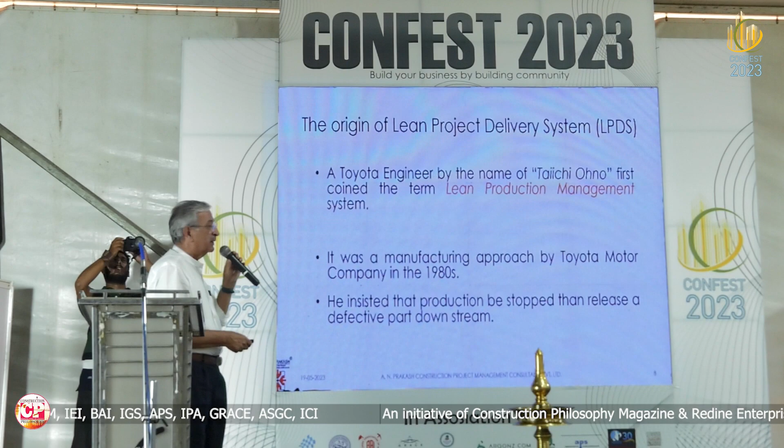The origin of lean, the lean project delivery system, came from Taiichi Ohno — a very interesting, fortunately Japanese, name, otherwise it sounds odd. His name is Ohno, it has nothing to do with English. It was a manufacturing approach at Toyota, where he said we can't have any wastage — if you find anything defective, we should stop it. That's where it came from.

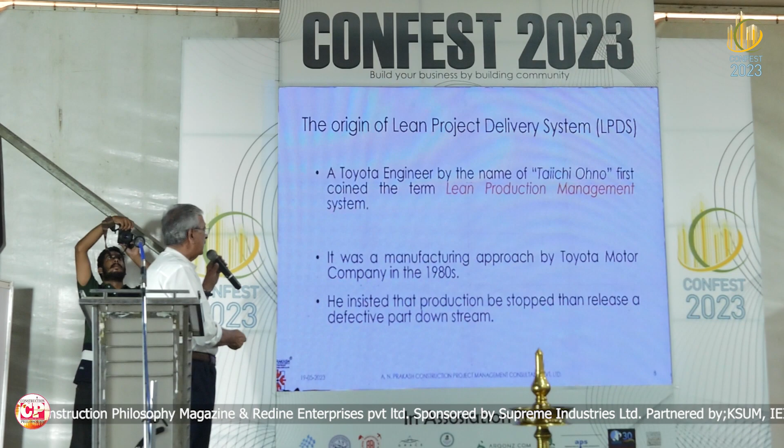And then we realized that if factories can adopt lean production management, why can't construction go lean? So that's how the concept of lean came in, saying let's just start looking at lean also. It is nothing but eliminating waste in all phases of the project.

Those of you who are in the construction field know that a project goes through a project life cycle from concept to completion stage. So every aspect of it, you can apply lean.

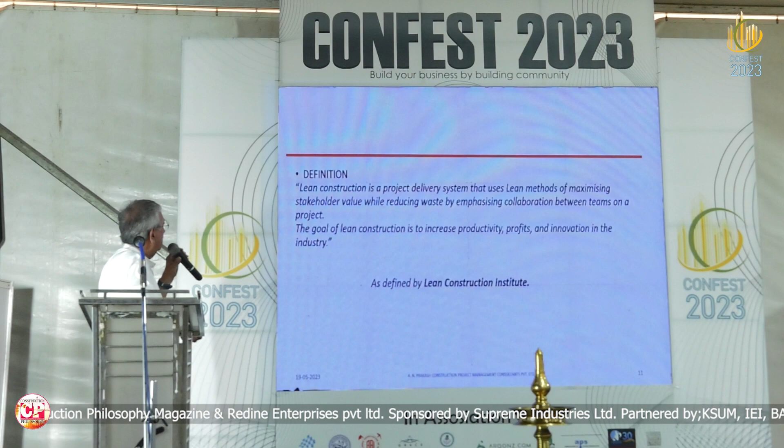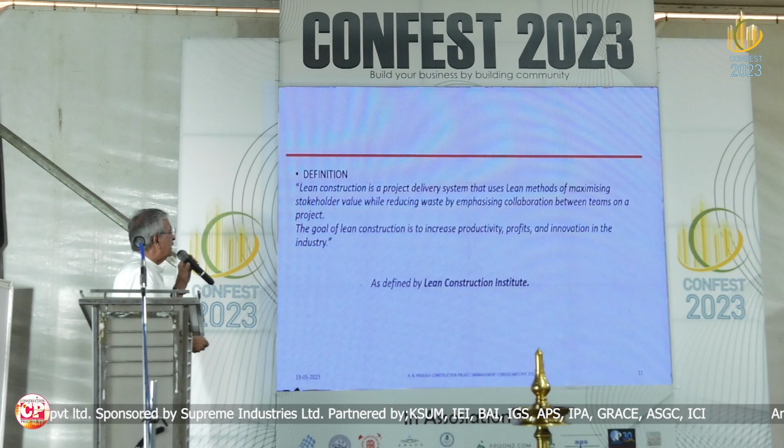This is what is defined by the Lean Construction Institute. Lean construction is a project delivery system that uses lean methods of maximizing stakeholder value while reducing waste, by emphasizing collaboration between teams on a project. The goal of lean construction is to increase productivity, profits, and innovation in the industry.

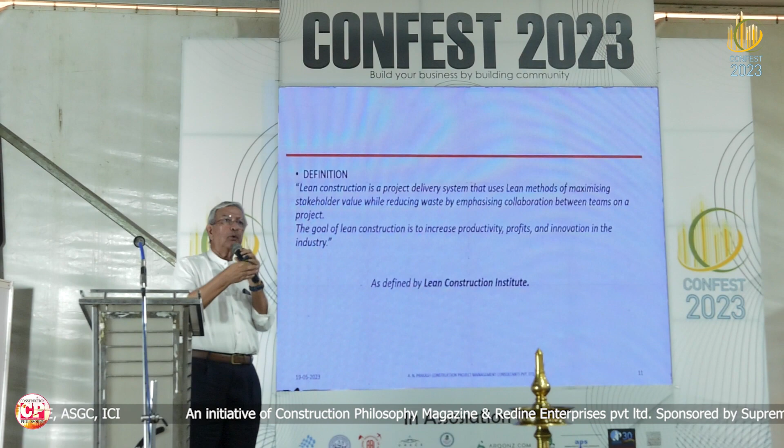I don't think I'm talking about anything different from what all of us have been doing. Mr. Iyer started saying that you have to talk and find out from the users as to what they want. That's done to make sure you don't end up building something that is not used. In the UK, they built economic housing which was not occupied at all because the users didn't want to go in there. So they didn't consult the users as to what they wanted.

This is one of the things that relates to the goals, tenets, or principles of lean construction. So it's the respect for people.

It's a very interesting one. When you say respect for people, what they mean is it is not just the stakeholders as we normally consider them, without involving the end user. The end user is one of the things that has been forgotten in most cases.

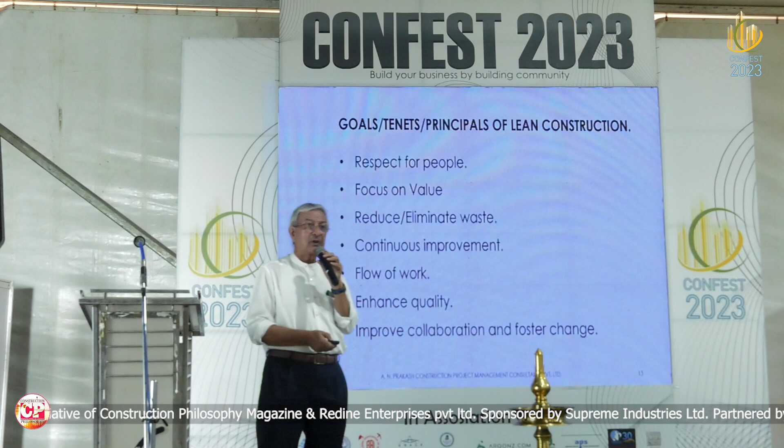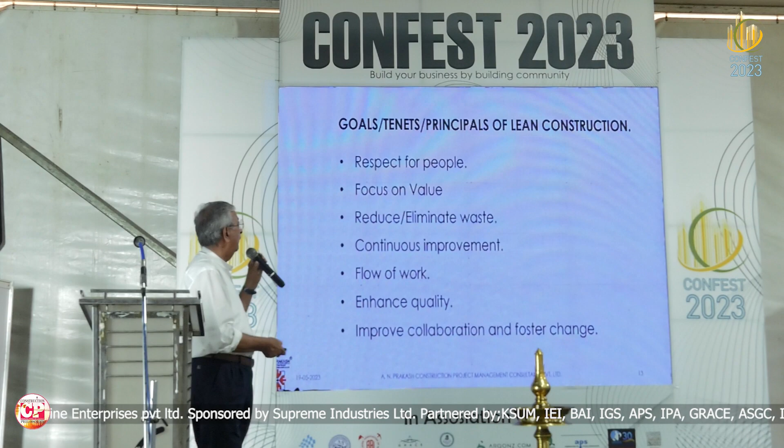I'll give you a few examples where end users were forgotten. There are a lot of papers published on it. Those interested in lean construction should read papers on that. So we just focus on value, reduce and eliminate waste, continuous improvement, flow of work, enhance quality, improve collaboration, and foster change. And everybody wants it.

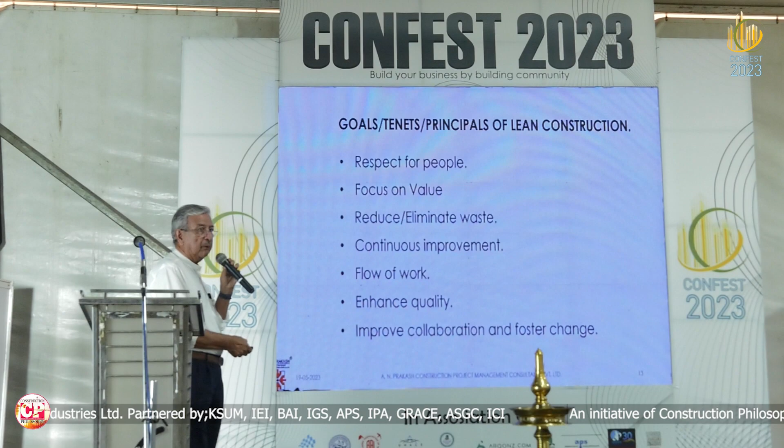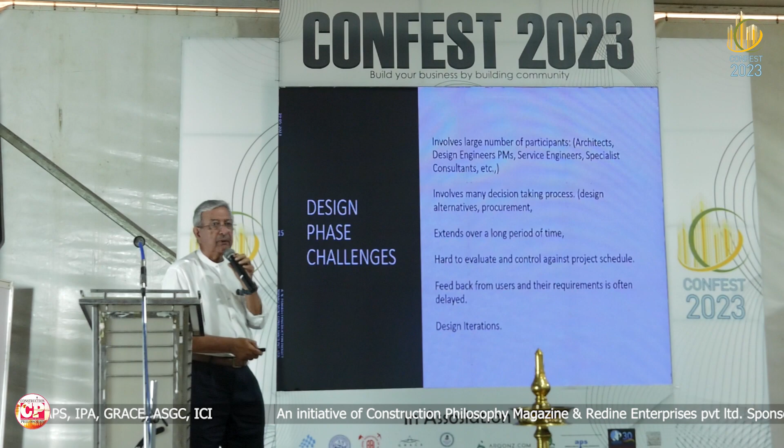So how can we achieve lean in the construction project management process? It involves a large number of projects and participants. One thing all of us accept is that initially it involves a large number of participants - architects, design engineers, PMCs, service engineers - and the decision-making process extends over a long period of time.

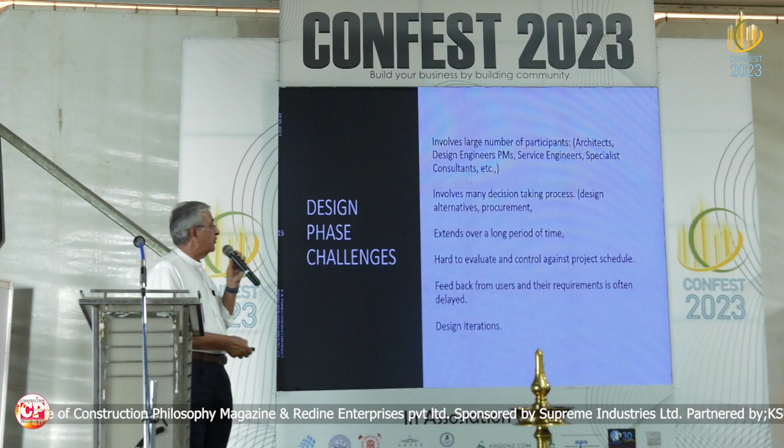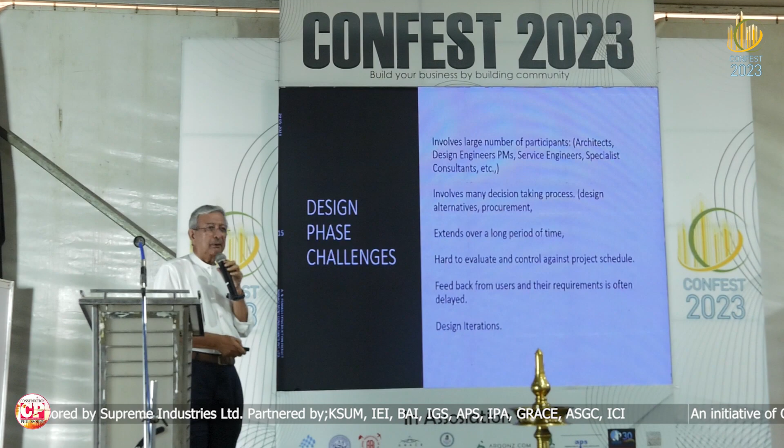It's endless. Every time an architect starts with it, you have a client who keeps on talking about - here comes my friend, Prakash. Satyavani, Satya Prakash has come. How did you know I had started talking?

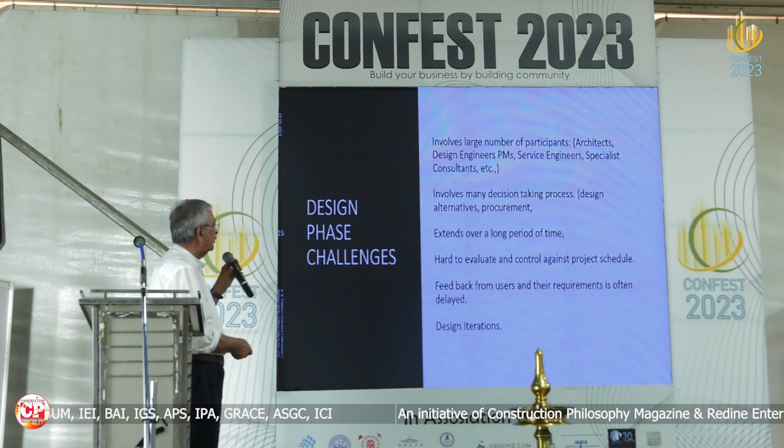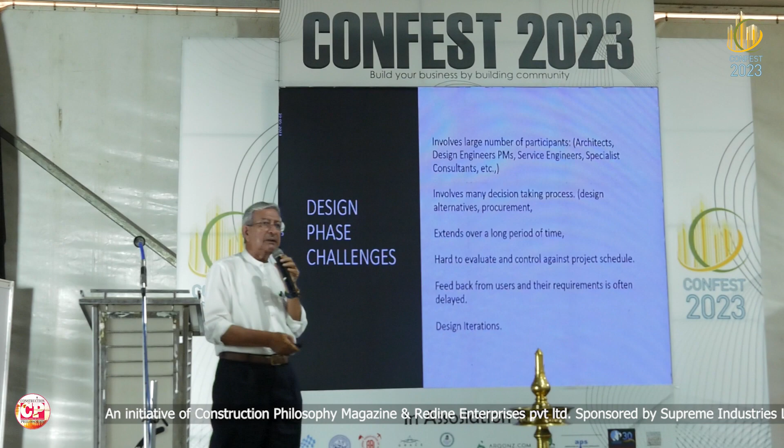It's hard to evaluate and control against the project schedule. Feedback from users and their requirements is often delayed. This is one of the things that causes delays. What we're talking about with lean is not wasting time. Time is the focus here, and that's why we're coming from the production mindset - you don't waste time between one activity and another.

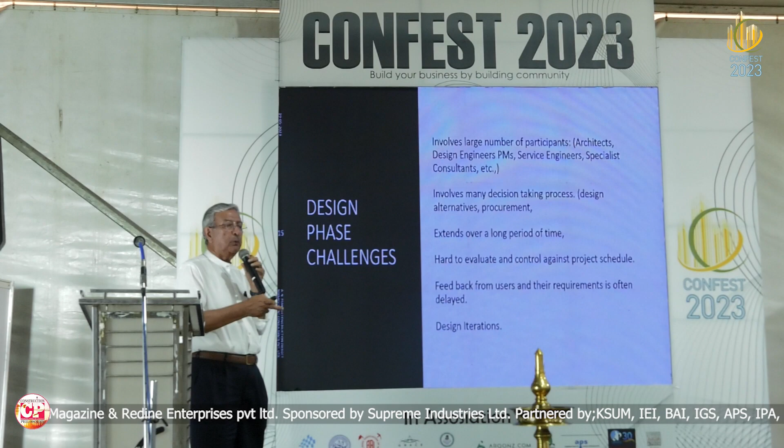The voice of the customer - this is something I want to stress on. Voice of the customer is something that is often lost. That's where we have to start.

So even at the design phase, we designed some very small nursery schools where we interacted with the teachers, and of course a lot of work needed to be done. There are also papers published on this, on how the involvement of the customer is required. For example, in the case of a hospital, the doctors don't know what they want, and it's up to us to have a checklist.

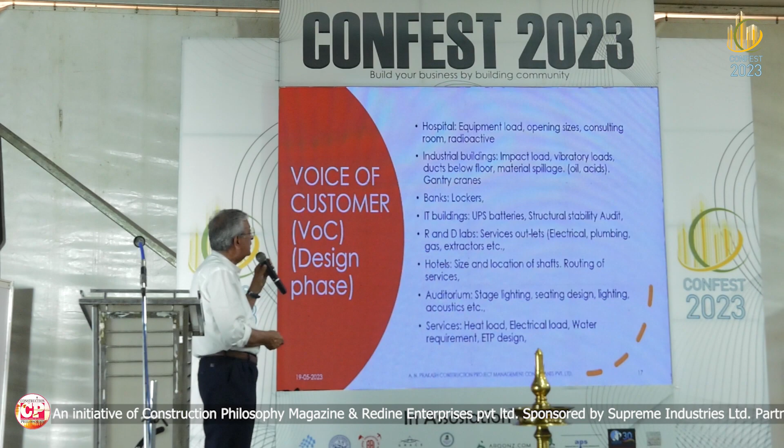We have done a couple of brownfield projects. I will show you some slides where, at the end of the day, they come and tell you they have an MRI machine weighing so many tons that they want to put on the first floor. So unless we talk to them, in some cases we have not been able to even bring it inside the building because of the structural configuration. So for industrial buildings, there's the impact load - particularly for a forge building, whether the whole foundation has to be isolated.

Banks - we have had banks where they come and say, I've got lockers which we have to put on top. IT buildings, hotels - I'll show you some sketches and photographs. I'm more interested in showing photographs, I believe.

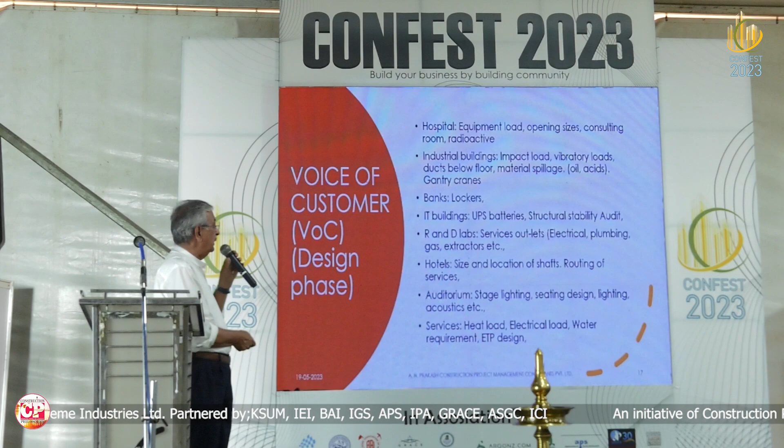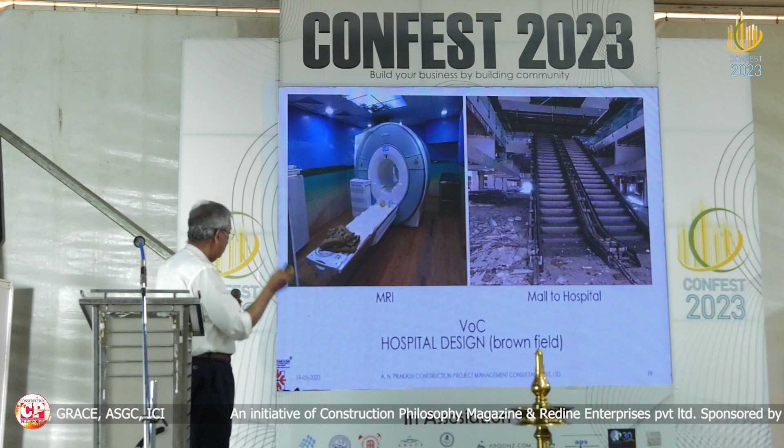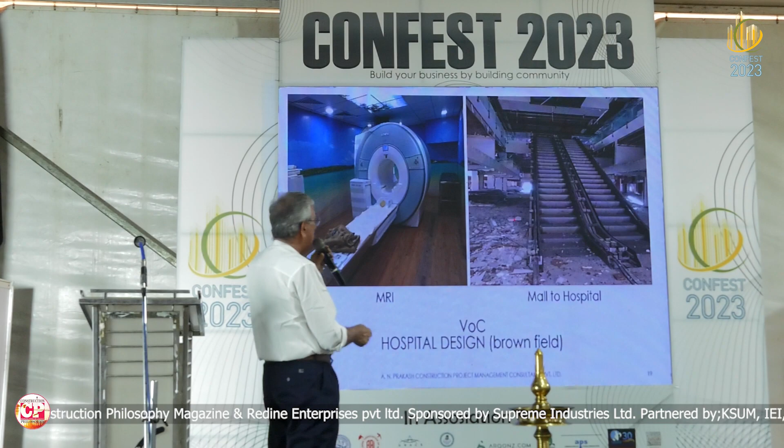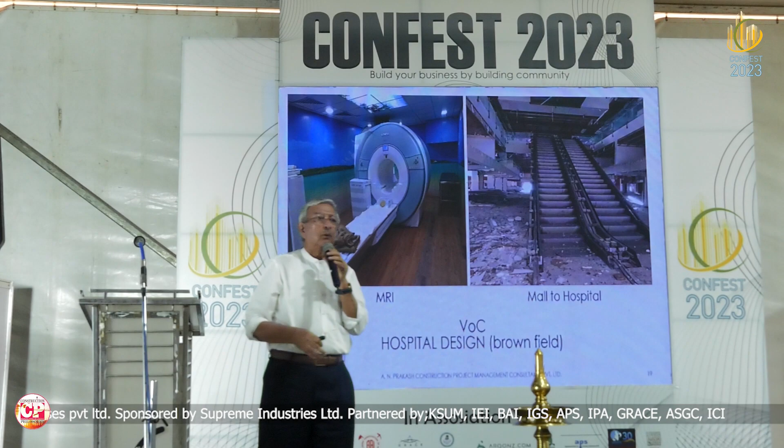See, this is an MRI. There's a fly which is very friendly to me. So this is a building which we converted from a mall into a hospital, where you can see there is an escalator. This was removed and we had to span all these things. And then one day they suddenly said that we want an MRI at a particular level. When we wanted to take this, it's a 6 ton load. It's just about 2 square meters. This weighs 6 tons. So there is an existing building.

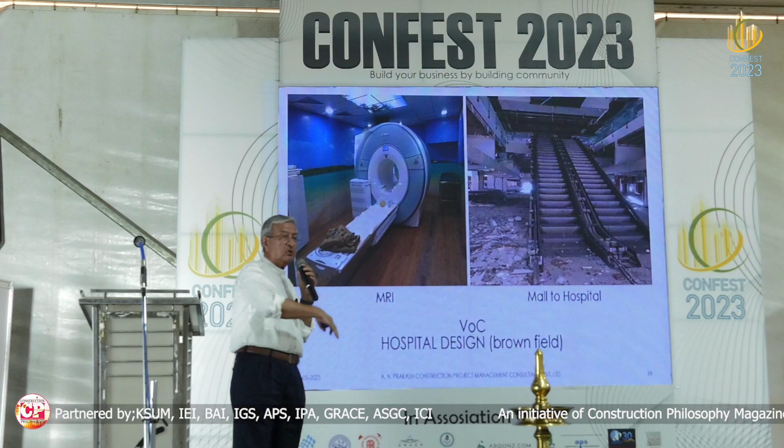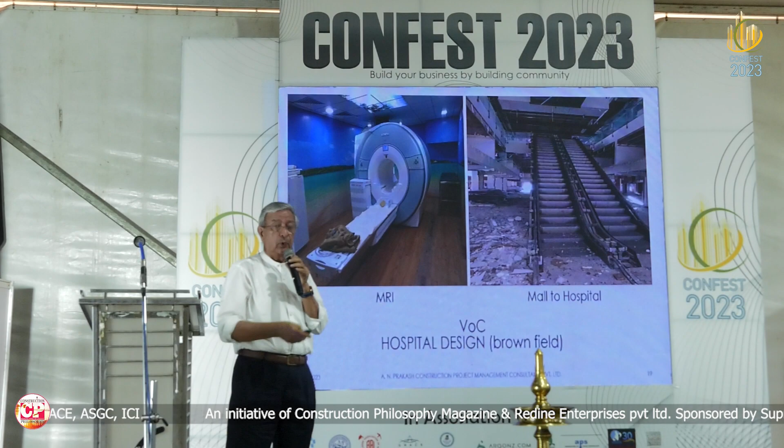So if you had not talked to those doctors and found out what you want, you will not be able to know what you have to give at the end of the day. Again, you will lose time strengthening that. If you were to do it earlier itself, you'll do better. There are many examples, I'm just giving you one or two because of paucity of time.

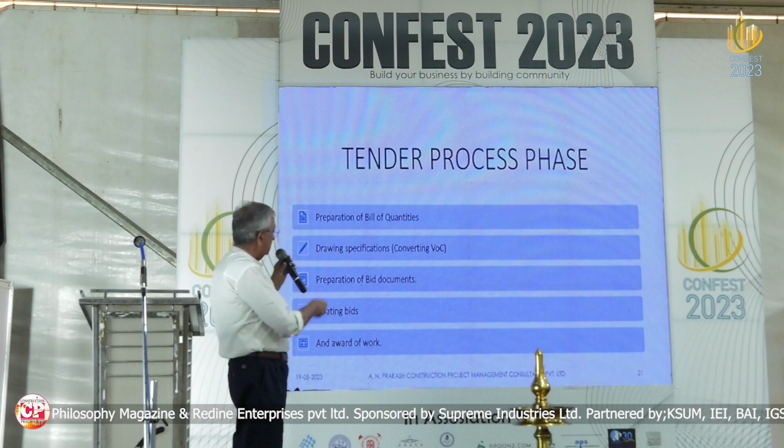The other thing is the tender process. Of course all of you know this, I'm talking to those who don't. One is the preparation of bill of quantities, this is the normal process. But one important thing is the pre-bid meeting. We believe in these pre-bid meetings, because a pre-bid meeting solves a lot of problems you may not have to face during construction. People say you should not put all the contractors together, that they will gang up, but that's all bunkum, there is nothing like that. You should just meet them and tell them what you want, and they come out with a lot of questions. If you solve them, then you don't end up with change management or non-tender items, because you cannot write everything in a book. So his assumptions may not be what you want. So this is one of the things that helps us.

What time is the lunch? I'm also hungry.

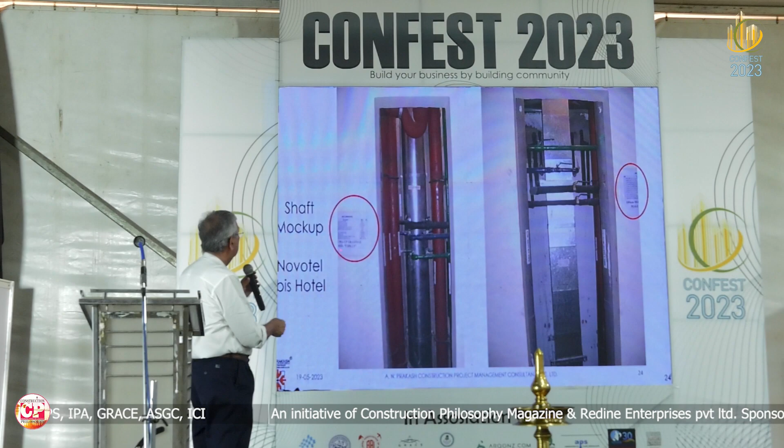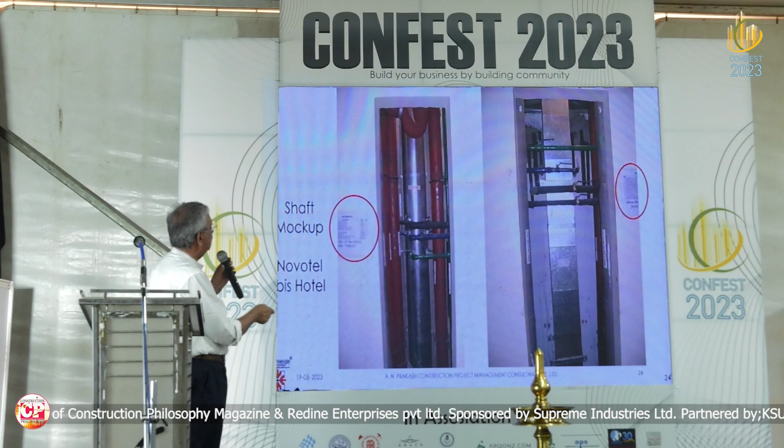So in the construction phase, this is one of the projects where for the hotels, we had the shaft samples done. You can see here there is a small sticker which you can't read - this was just to say how the sequencing has to be done. Because if you were not to have this shaft sample done, you would have this fellow coming first, and probably end up having the front pipes done earlier and the pipe at the back, the contractor isn't taken on time and doesn't place that particular duct. So the sequencing of work that needs to be done has to be discussed.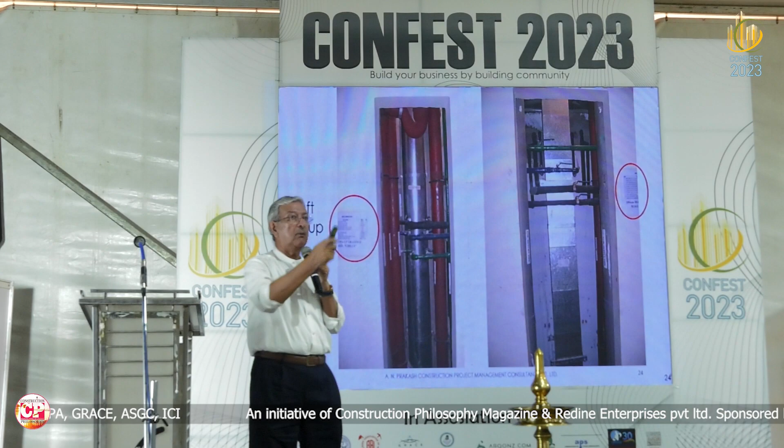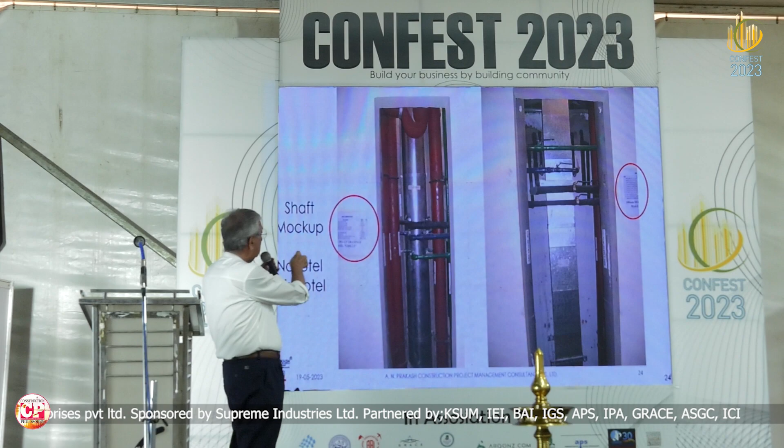This is where the importance of collaboration comes in. What we do in such projects is involve the project operations, hotel operations guy, the plumber, the electricians - we get them because they want to maintain it at a later stage. If you give him a shaft where he can't even put a spanner, he says I don't want to come to this hotel, or I can't maintain this. So one other thing we do is involve the lowest level of people to ask, is this all fine? That was the purpose of making this and showing it to them, and the sequence is also written. So it was left there for nearly a week for everybody to look at it and comment.

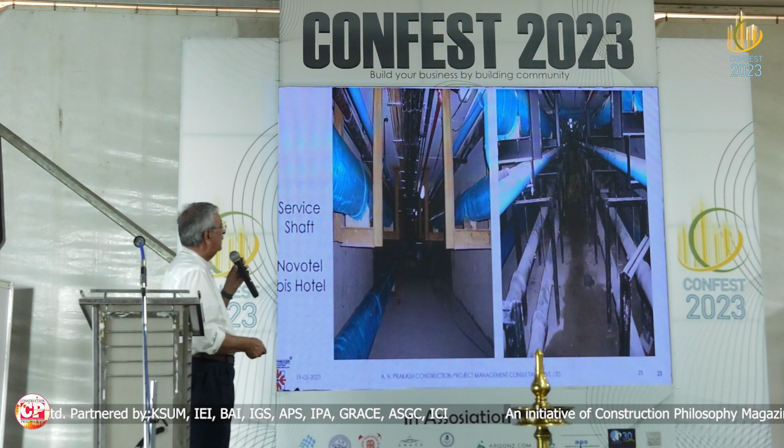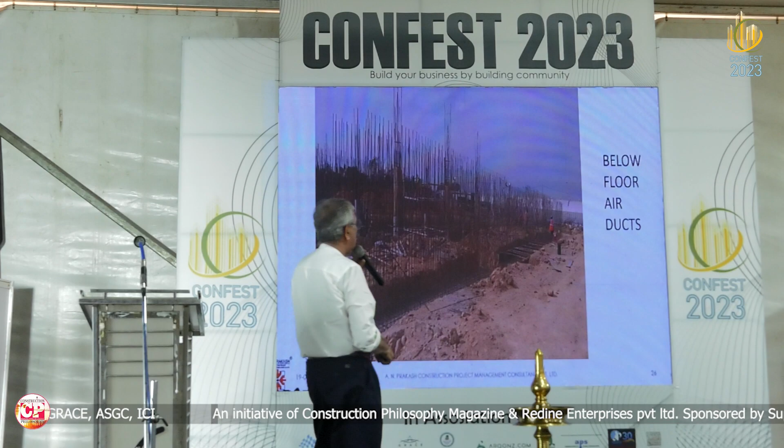This is another shaft, showing the intensity of the services. This is a textile mill project - I'll show you the mill itself next. This has got underground ducts, all ventilation ducts. If these ventilation ducts are nearly 1.5 meters, should it be precast, should it be cast in situ, how do we do it, where do we do it? This is such an important thing, to get involved with the production guys.

The production guys have to become part of the design process that we have. You have to invite them. Normally what happens is there's some facilities guy who is there in the factory - he comes and sits, but he doesn't know anything about the production.

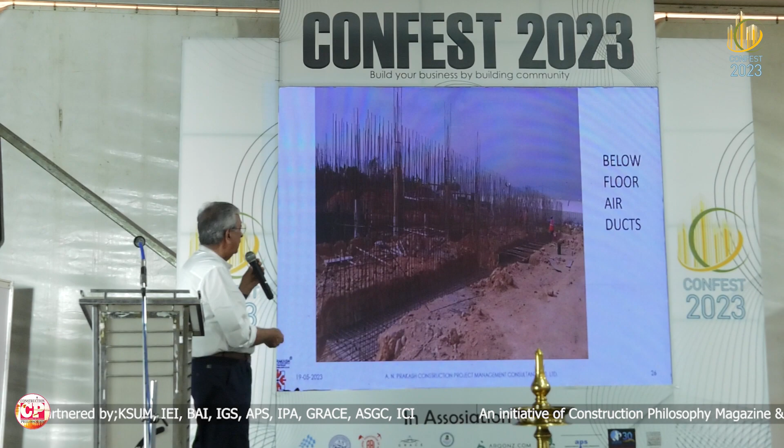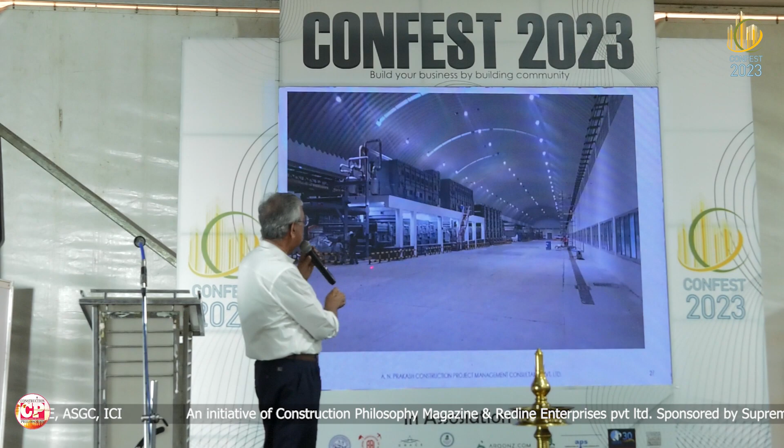This is the completed project, nearly 1.5 kilometers long. See, these are the ducts, and there are also ducts there. So if this is the end of the day, this is what you're going to get if you don't discuss with them - then you're into deep trouble.

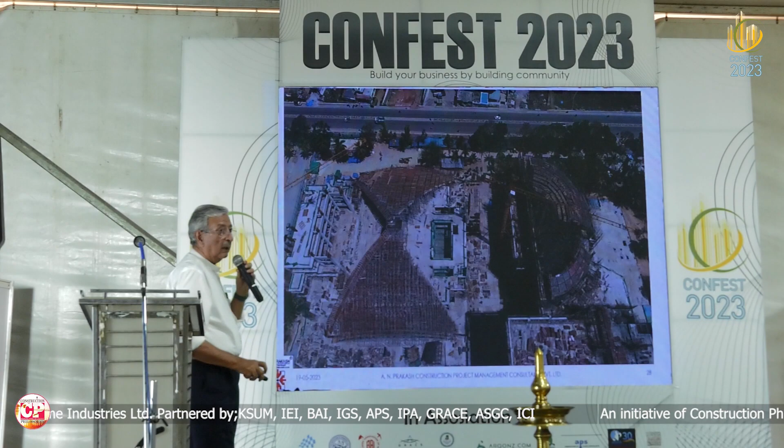Another thing is, this is a project still in progress. This probably would end up as one of the biggest projects in terms of a hyperbolic paraboloid shell - a 75 meter by 75 meter hyperbolic paraboloid shell, and it also has a dome here, where the shuttering is in progress, the dome is also in progress. Now, why I'm showing you this is, none of us have experience as to how we do the concreting for this. This needs a double shutter because of the slope, very steep slopes.

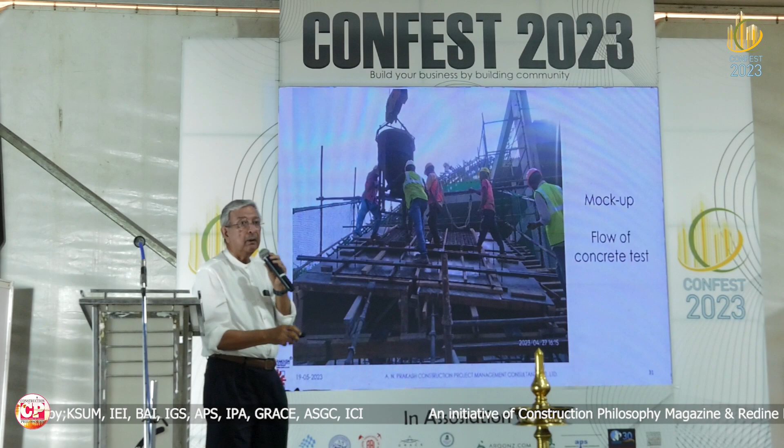Then what should be the aggregate size? Will the aggregate really flow? I will show you. So this is the dome from the other side, and this is again another formwork in progress. We really got samples done. You can see here there is a double shuttering - there is a shutter and there is a double shutter.

We are trying to see what is the rate of flow of concrete for 1 meter depth. If you don't know that, you're unable to plan your date of concreting, how much time it will take to complete the concreting, what will be the de-shuttering time - because we don't know even how long it will take to flow. So we literally had to go through this - earlier it had a 6 millimeter mesh. You won't believe it, the whole slab thickness is only 50 millimeters. The mesh was 6 millimeters, it was changed to 5 millimeters to accommodate.

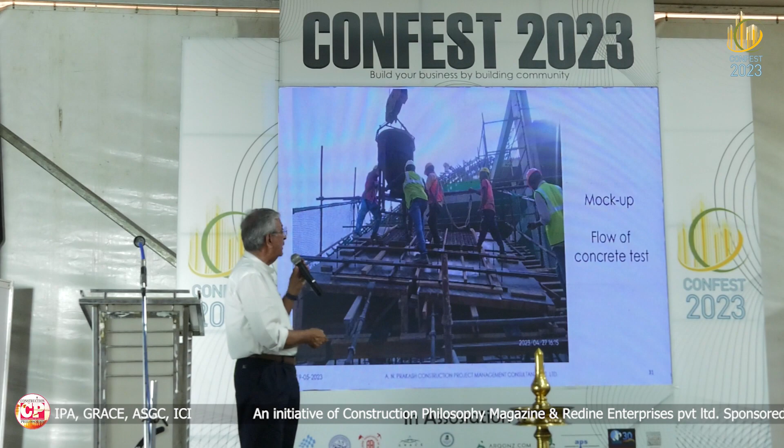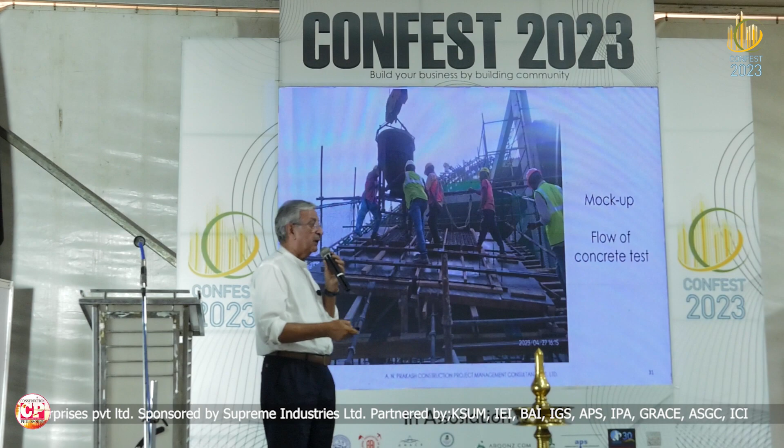Here again, why I am talking to you about lean construction is - we got the foreman and the concrete people, and the people involved in doing the shuttering, involved in it, to ask what happens, can we really do this? Is it absolute theory, or can we really have that done on the site? So this is how a lot of experiments took place. We are still doing mock-ups for various shuttering, various angles - not one angle, as I told you, it's a hyperbolic paraboloid. This is where you can see it is de-shuttered, and they are still going on.

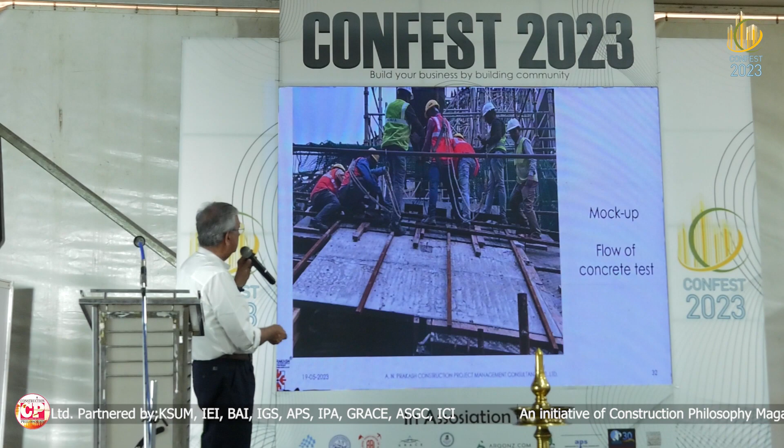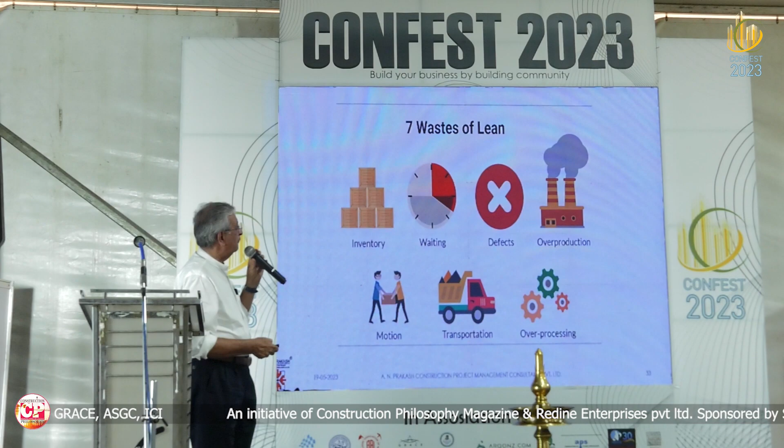These are the 7 wastes. This is theory: inventory waste, waiting, defects, overproduction, motion, transportation, and overprocessing. So these are 7, I've written in bracket 8 because 7 is what the Lean Construction Institutes talk about. But the 8th one is skills, which is normally not mentioned. Muda in Japanese means wasteful activities, that's why it's called 7 mudas.

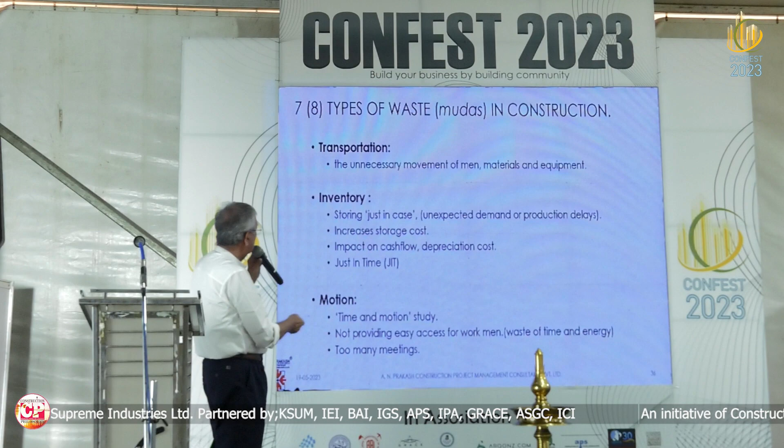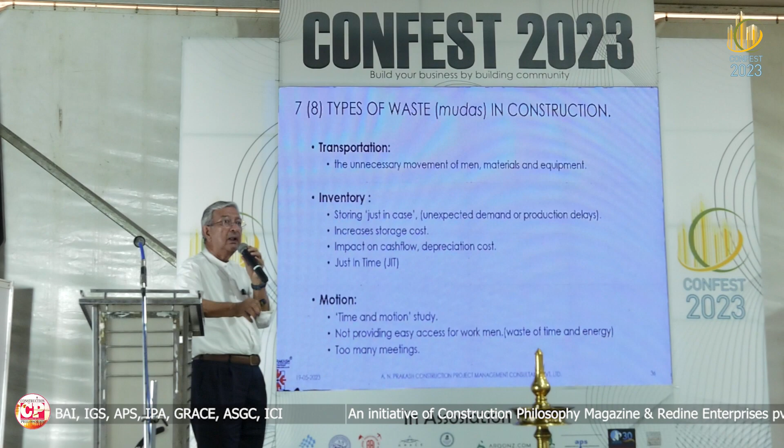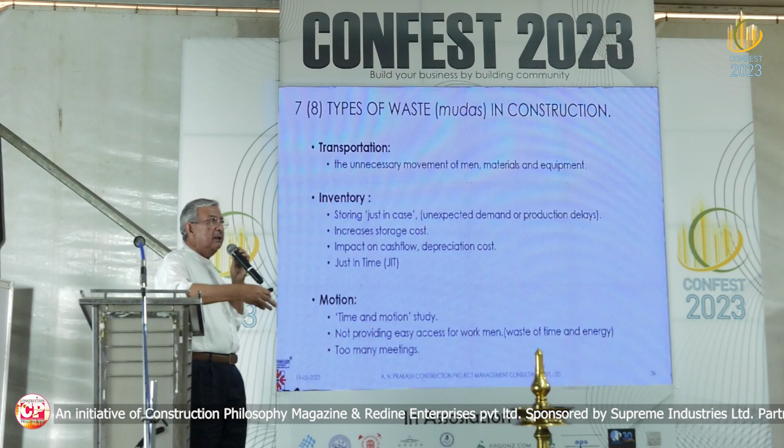So transportation, there is wastage in unnecessary movement, you have seen. One of the things that you do is to avoid unnecessary movement, and also as a part of sustainability, have the RMC plant within the site if possible. So the movement is reduced, because even though there's a given radius you can have, we have seen ways where we can put it on the site.

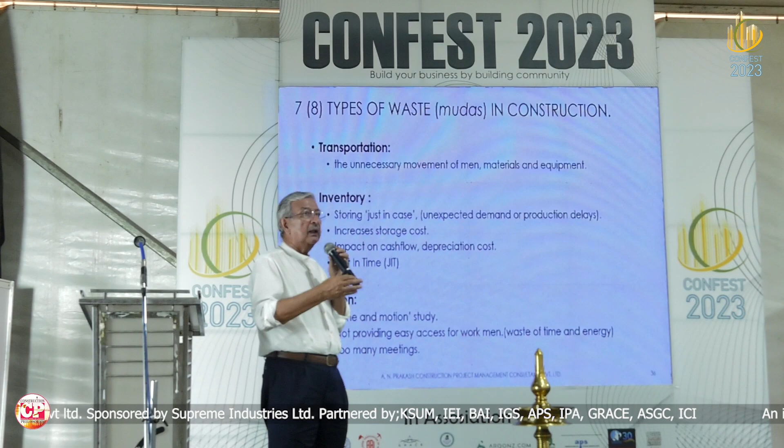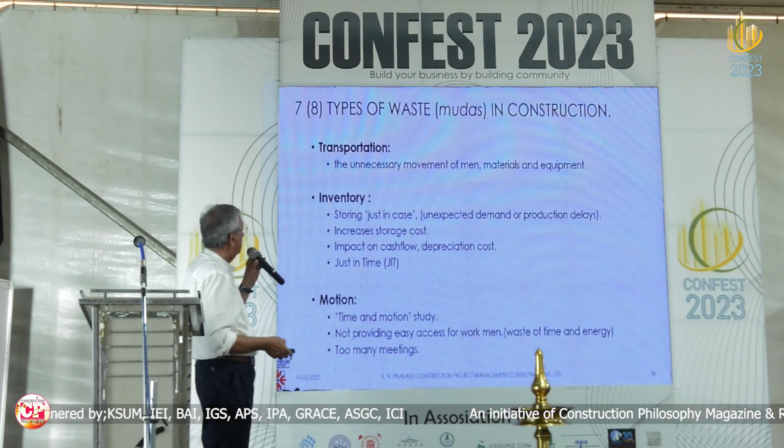Storing just in case - I think earlier they were talking about getting certain things thinking there will be a strike, something will happen, we may not be able to get it. But that is another way of wastage of storage space, and all of us know about just-in-time storage that the Japanese talk about, so that they don't even store anything in their factory, they get everything from outside.

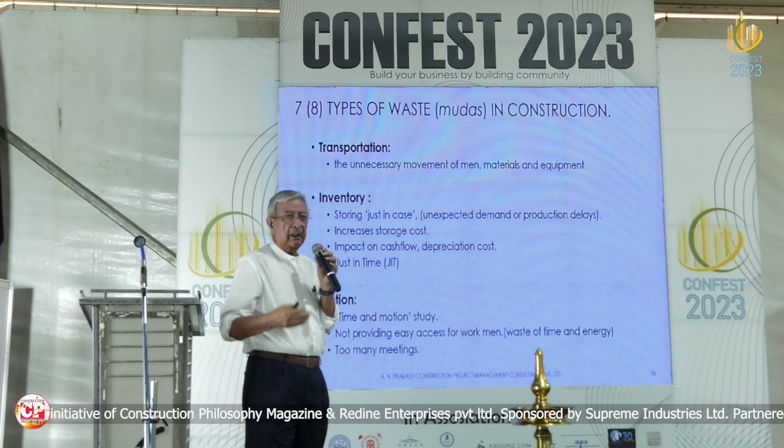Motion. We had a case, one of my earlier days, nearly 30 years back, where masons used to go up the floor to the 10th floor and wait till about 11:30 for the blocks to come up. Because those days there was not much of cranes, etc.

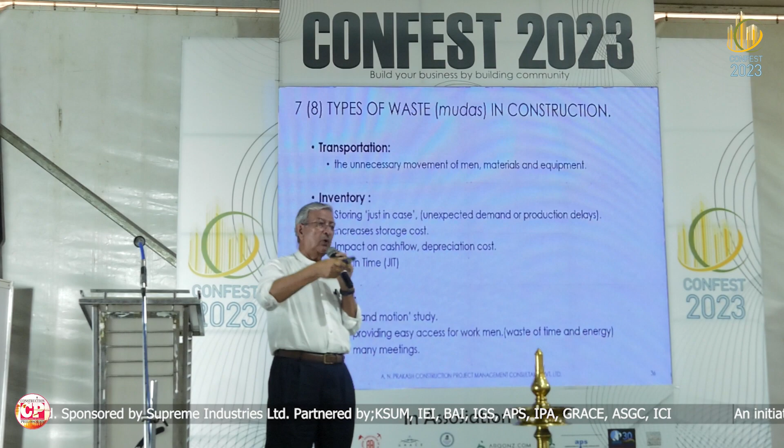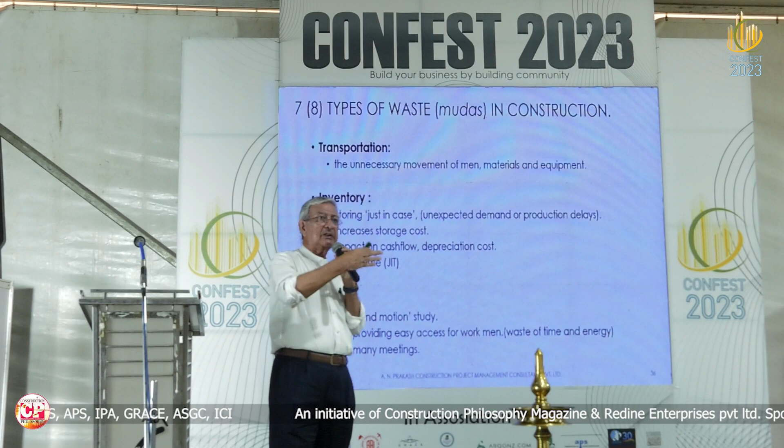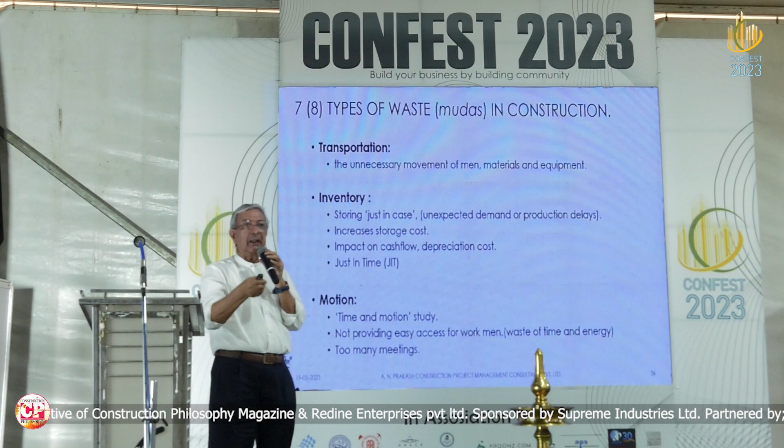We only had those motorized lifts that used to go. So the contractor was worried that the masons... then we had to tell him, look, a mason's time of 3 hours is more important than engaging a laborer the previous day to take these blocks and keep them in place so that he starts the work immediately. That calculation had to be done. So that's one case of time and motion study, to make sure of what you do.

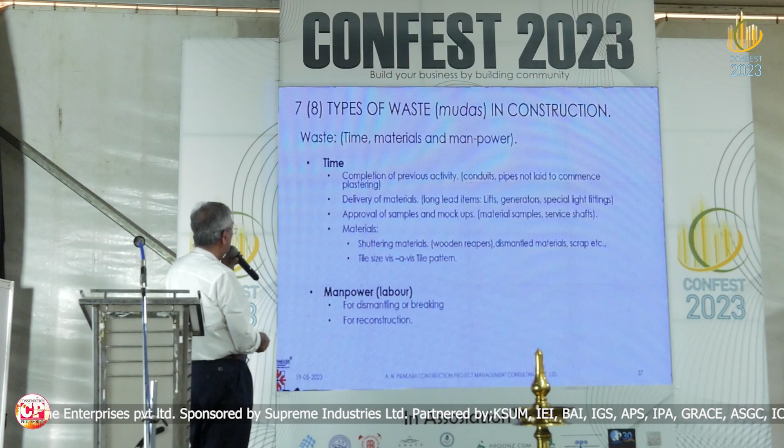So these are all various things that are there - overproduction, waste, overprocessing, defects. Defects, I think we already talked about, but there is also a very interesting thing, cost of poor quality.

Cost of poor quality - as a matter of fact, I published a paper on LinkedIn also. What is cost of poor quality? You are expected to do quality work. There is a known and an unknown. The cost of poor quality could be your reputation - it is not known, how do you evaluate that? Cost of poor quality is a waste of time - how do you evaluate that? So cost of poor quality also has to be evaluated in terms of things that are nebulous.

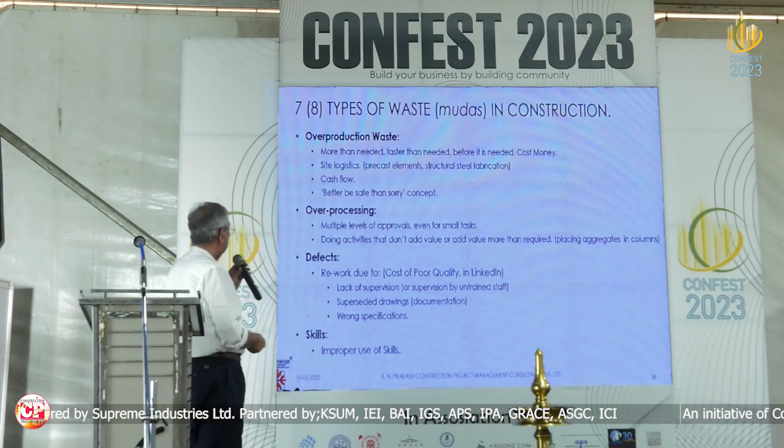Use of improper skills - because the mason has not come, you ask his assistant to do it. It's like asking the compounder to give you medicine because the doctor is not there. So that's something that's not to be done.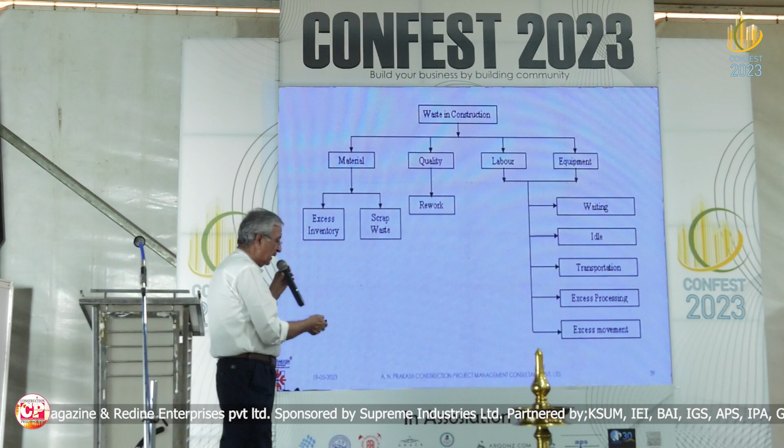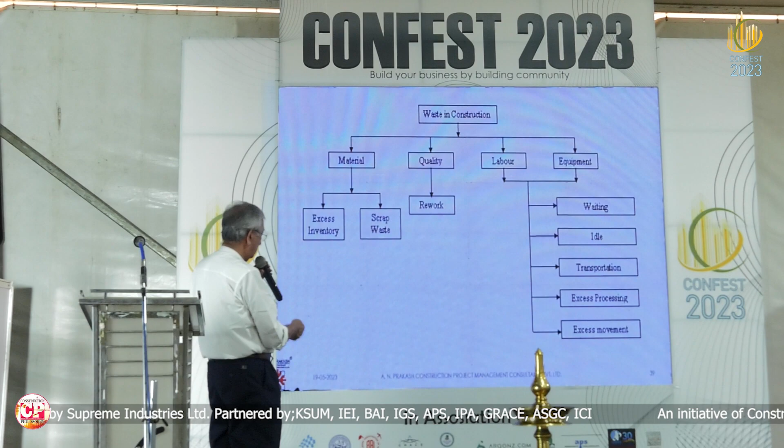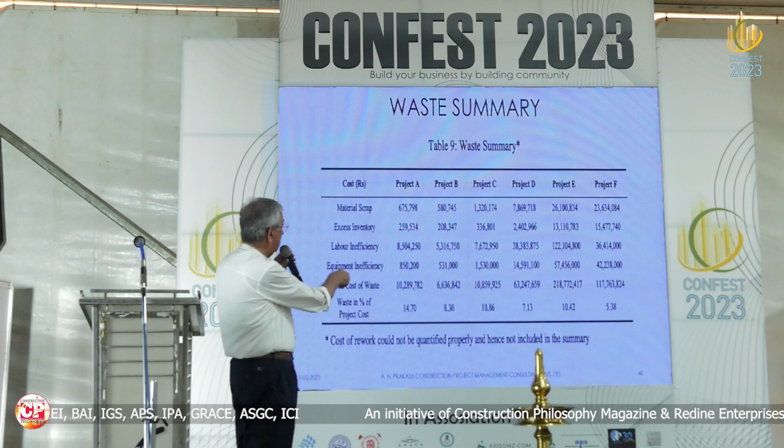There is a paper published by a professor from the Indian Institute of Technology, Madras. He has calculated what is the cost of waste in materials - it's a very interesting paper, I've taken it from there. He has elaborated, it's quite interesting. He has calculated in one of the tables the wastage in percentage - the project value to the scrap value. If you total it up, you can see in some of them it is even 10.86, 10.42 percent of the project cost as wastage. So you can imagine that it's going unmeasured. This is something that needs to be measured.

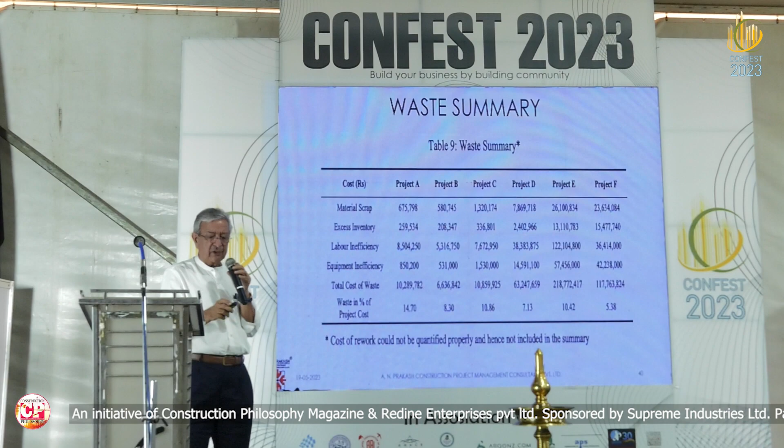A few techniques - there are a lot of techniques, like the last planner system, and there is also lean project delivery system, developed by the Lean Construction Institute. There's another thing called line of balance - I don't know how many of you use it. This line of balance is used where you have sequential activities. For example, if you are doing 20 villas, continuously there are activities. Also when you are doing block work, conduit, masonry, you have it sequentially, so there's what's called a line of balance - that's another method that is used. I'm just telling you about it so that people can read about it.

So what is wrong with conventional construction project management? The only thing wrong is that we don't go into the nitty-gritties to make sure we coordinate with the lowest of the fellows to see whether all the activities we are doing are getting ready for the next step. We have people wasting time saying 'I have not received this,' and so on. That's one major issue.

Controls and output measures miss the management of workflow creation and delivery of output value. Schedules portray a series of activities but ignore the flow of work between them. One activity leads to another - let's say the masonry is done, we wait for the electrical conduit fellow to come and do his work, because you can't do the plastering unless he does.

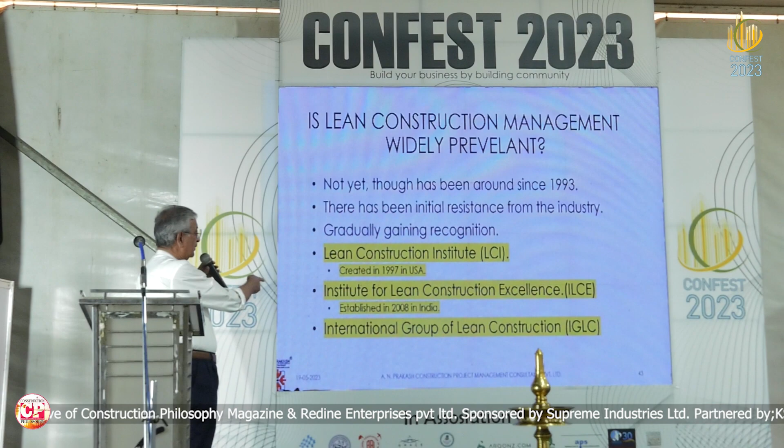This is a very interesting paper to read, about why construction management today is not what it's supposed to do. These are all the institutes - Lean Construction Institute USA, Institute for Lean Construction Excellence established in India, and I'm a member of that also. There's also the International Group of Lean Construction, IGLC - not an institute, just a group of people who discuss lean construction and have conferences all over the world.

Finally, what intrigues me is that we are a nation which doesn't waste at all, and yet we are talking about waste and saying we should save. Culturally, we have never been trained to waste anything - eliminating waste is part of who we are.

That's what I said - we use cow dung as fuel, and people are telling us don't waste. We don't waste anything, so where are we? Culturally we have forgotten everything. I remember my days when cow dung was used to smear on the ground because it is anti-termite. We have forgotten our olden days.

For example, our clothing - we all know about the mundus, dhotis, and panches, or the veshti as it's called in Tamil Nadu. This is one cloth that can be worn by generations. I can wear it, my son can wear it, and if I am not wearing it, he can wear it - it is something where we are not wasting. It is also worn in many different styles.